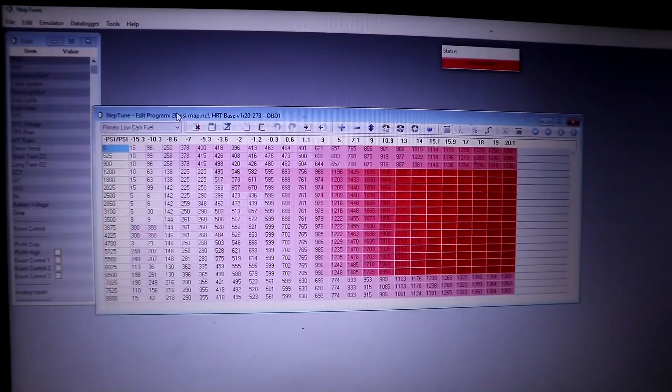So for anyone wondering, I'm running Neptune RTP Demon V2, and this is what that looks like. But most of your standard tuning maps are going to look pretty damn similar to this.

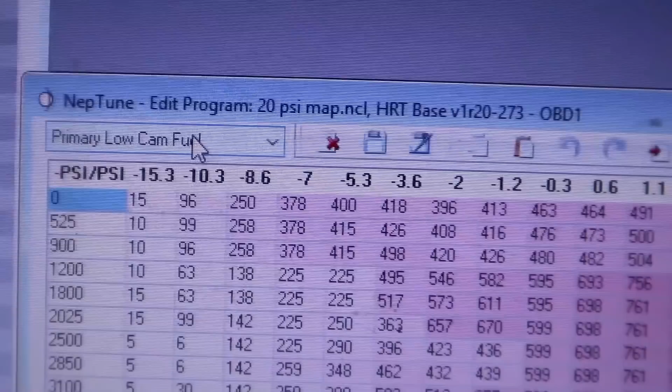So first thing you want to do is, if you have a Honda, obviously it's going to be low cam fuel, or if you have any type of VVTi, you're going to have something that says something like low cam fuel. And you're going to have, it could vary, like mine, it's on this axis and the RPMs are here.

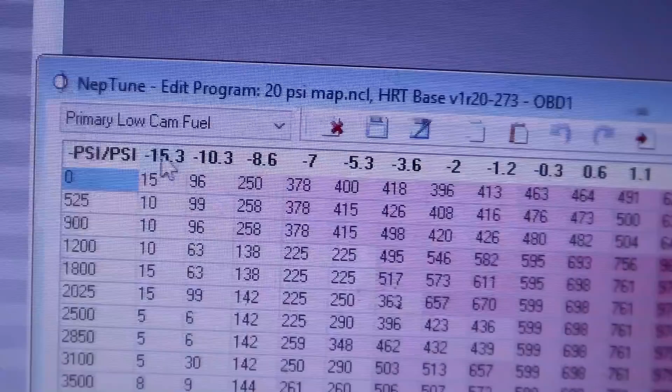It could be backwards, but basically you want to find the highest point of vacuum, which is basically like, alright, so your car's going to be idling, like mine idles right here between 63 and 138.

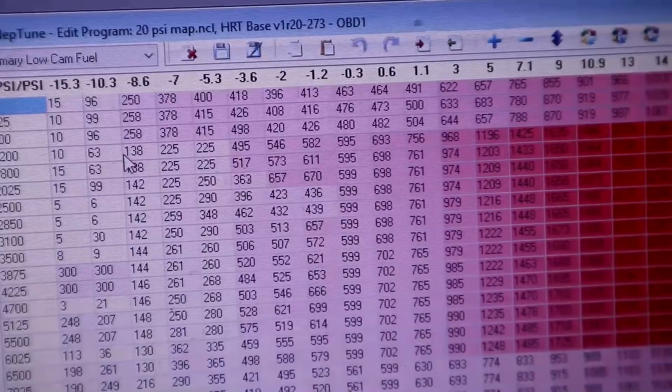So mine idles right here, and then you're going to rev it up and build boost if you have it, and it's going to go down here, and then when you let off the gas it shoots this way. Say you let off like way up top at red line, it's going to shoot this way and then go up.

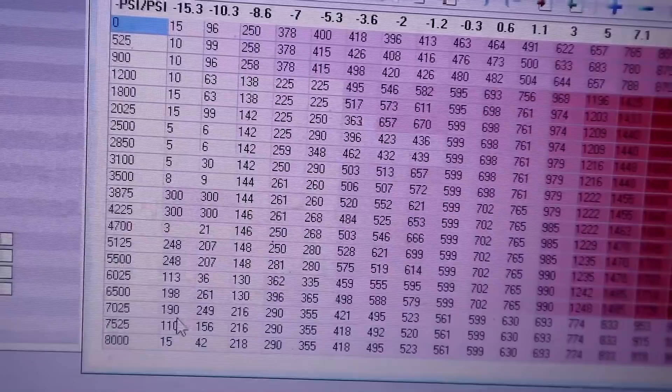So the farthest cell and the one next to it, just to be safe, you want to add fuel to. Now this is what I have, and I think mine shoots the biggest flames right here. So I'm going to change all of these to 300, but in between these I just have these small numbers, and that's just going to be like regular crackle. It's going to be lean, and when you're on a down rev, typically your injectors are shut off anyway, so it's lean anyway.

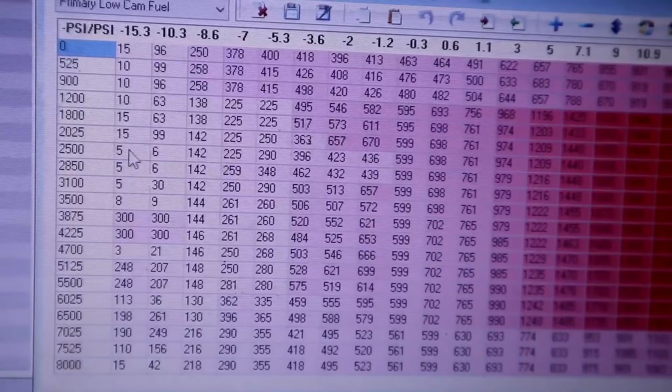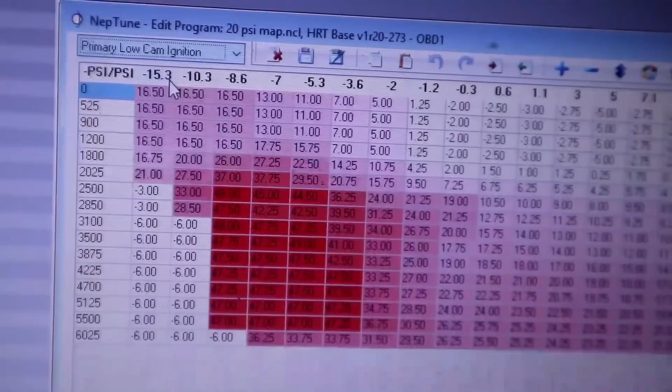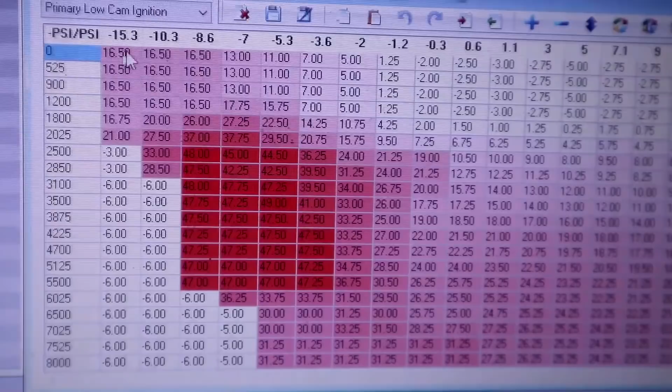So next, you're going to come to low cam ignition, and basically just as much negative as you can in the low load cells. This is actually what I'm doing to combat the fuel loss here. I'm actually making up for it in lean burn, and I'm cruising at like 17 AFR.

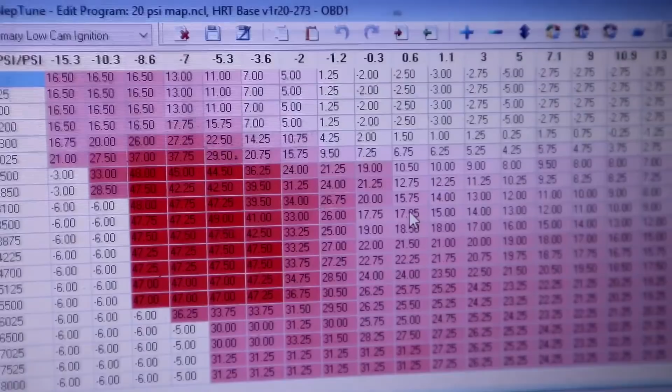You just basically add timing and take away fuel, so when you're cruising you're at a really high AFR, not so high that you're going to be burning stuff up, but high enough that if there's no load on the car, you're going to save some gas. Then the second you step on the gas, obviously the vacuum's going to go up, and you've got your regular ignition and fueling and whatnot.

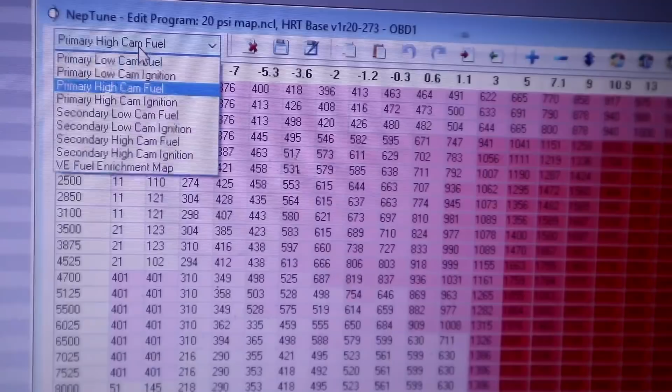But anyways, low cam ignition, you're going to want to do that. And what I do anyway, I don't know if you need to, but I do the same on the high cam fuel. So this is my fuel for high cam, which my VTEC starts at 4,500 on high load. So I have a bunch of fuel right here, so that when I let off, because it takes a second to go back into the low cam map.

You also have the same exact thing. This is as far back as I can go in negatives, but some cars can go more. Try it out, play with the numbers, and have a friend drive behind you and tell you what is working and what isn't.

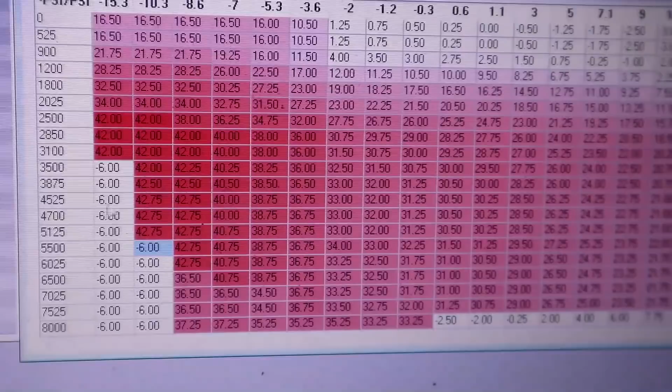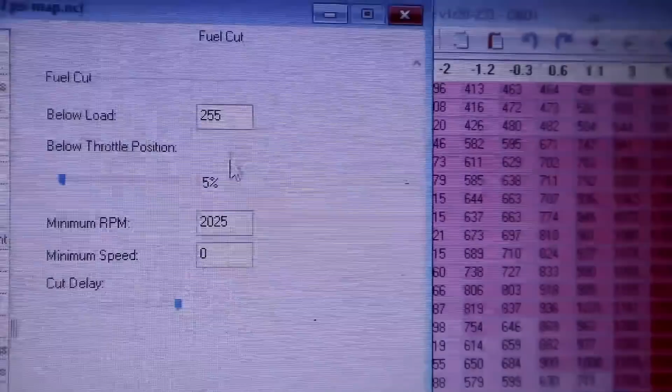So after you do all that, you're going to find wherever in your software the fuel cut is. Mine is parameters, extras, and right here it says fuel cut. You're basically going to set it, you're going to have to play with this. Sometimes it's tricky, but these are the settings I have. I have like a 5-6 second delay, and my injector's still shut off, but I have enough seconds for it to shoot these flames that you're about to see.